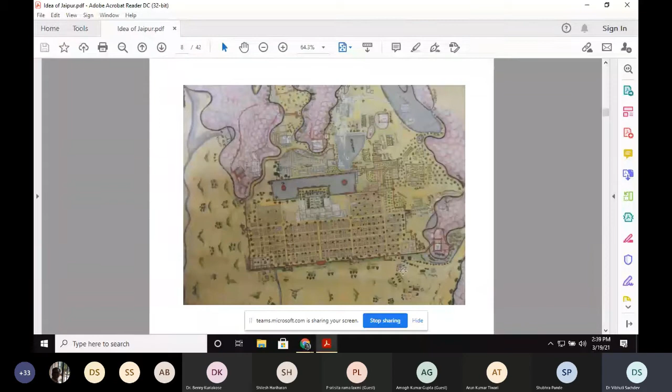You can see these drawings have a lot of information, like miniature paintings have. In miniature paintings also, you must notice, to a modern mind, that is a wrong perspective. But the thing is that it uses a sort of multi-perspective to show as much information as possible, so that at once you can see what is outside, what is inside the room, what is behind the house in one drawing. That was kind of communication, and layering of information was of course the key agenda.

And this is a later drawing of Jaipur, and you can see the mohallas and the chaupars and the principal streets.

So my process was to reconstruct from the theory that I had studied for over 3 years as a PhD, but before that I had relearned Sanskrit and engaged with the texts, to kind of reconstruct the process of design from theory to what Jaipur is.

So I looked at the mandala, of course, and there were lots of guidelines, that a city with seven—a pura is one that has 7 gates, one that has principal streets that are perpendicular to each other, a central open space. And this is the sort of concept that was beginning to emerge from various readings of Vastu Shastra texts.

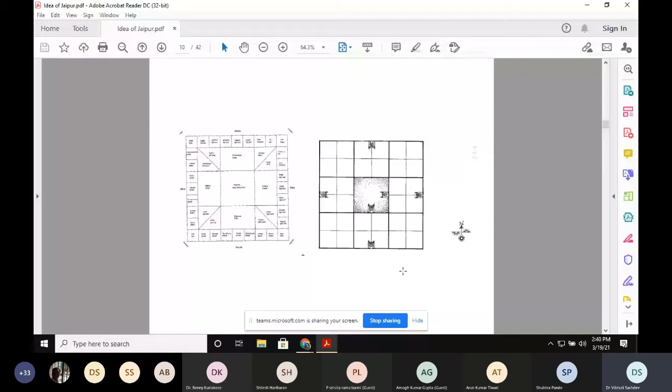Now, this principal road that leads to Agra and Ajmer is the Mughal Highway. This is where most of the revenue is collected. This is the road that the Mughals used to go to their pilgrim sites, two very important Mughal sites of Agra and Ajmer. And then you have a road that goes to Delhi, which is this one, another very important road which cut across the site.

So, in a sense, you've got these hills. You've got Nahargarh on the top left, and in the southeast, you've got a hill with a Surya temple in the middle. This is the Surya Mandir. And then you've got this lake.

So, basically, the 2 principal axes of the site are already present. One is that one cannot cross the Mughal Highway, because the land did not belong to him.

The land ended with this highway, and the other important use was the road that went through the site. So obviously, when you have a site, and Jai Singh had decided this to be a commercial city, a commercially lucrative city, what you decide is that when there is a road with already existing traffic and footfall, you route it through your site.

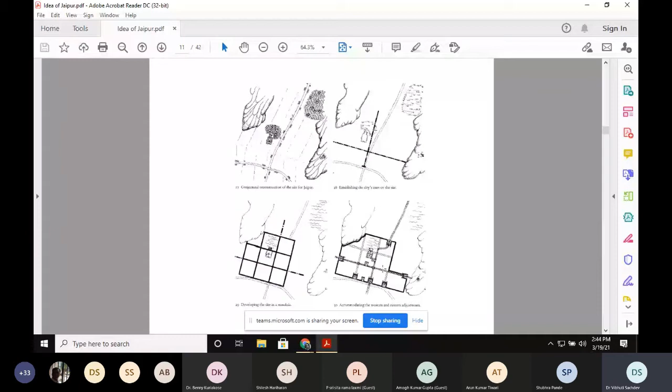You can see in the bottom right diagram the central Govind Dev temple, and in the central square is also the palace, the king's palace. You've got the road that cuts across, going north to Delhi, which is the Jauhari Bazaar, and then you've got the chaupars, and you see the form emerging of the entire city. And this is Jauhari Bazaar.

The material Jai Singh uses very cleverly - because this was designed and built in 4 years flat, a rapid city, designed quickly, helped by Vidyadhar Bhattacharya, who was a diwan, a planner - was designed using the color palette of the authority.

Bear in mind, the Mughals were the great builders. Akbar was a great builder who built Fatehpur Sikri, and then Shah Jahan after him built a lot in marble. Akbar used red sandstone. What Jai Singh very cleverly does is project the idea of red sandstone, but it is not red sandstone - it is rubble masonry, lime plaster, and geru. Geru is brick powder, terracotta. Terracotta means cooked earth - terra is earth, cotta is cooked.

This is what he uses for all the buildings that face the streets, so all the public spaces are in this color. You get this impression of red sandstone, but it's not red sandstone. It continues to fool us, and tells us that it might be pink, which is another story of how it got pink from geru.

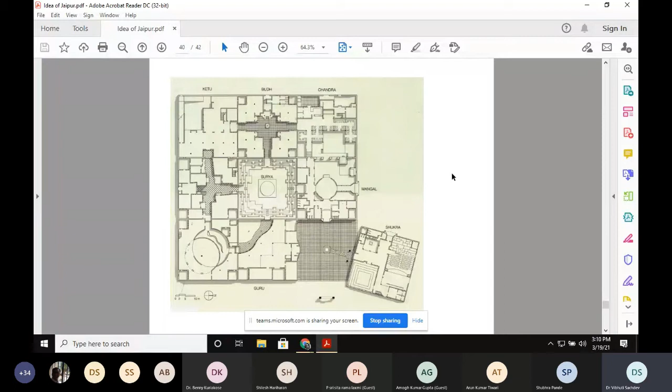So this is that, and then of course you have Correa's building, Jawahar Kala Kendra, which, apart from what I showed you of how the square moves to plug the gap between the hills, Correa uses that here as a conceptual tool, a conceptual motif, to give a reference to Jaipur when he moves the ninth square of the mandala out. Among the nine planets he's used, there are also references to Alvar Aalto, who was a great inspiration for him. And you can see the central courtyard, which has a reference to Modhera in its seating.

And this is my last slide, coming to the 1990s or late 80s. Thank you.

Thank you, ma'am. Thank you so much. I can just remember one quote that talking to or having a conversation with a wise person is worth reading 1,000 books. And definitely you have taken us through immense knowledge about one of the famous Indian urban fabrics. You truly have elucidated the history, culture, forms, material, spirituality, vastu, and whatnot. Thank you, ma'am, we are really enlightened with your presence today.

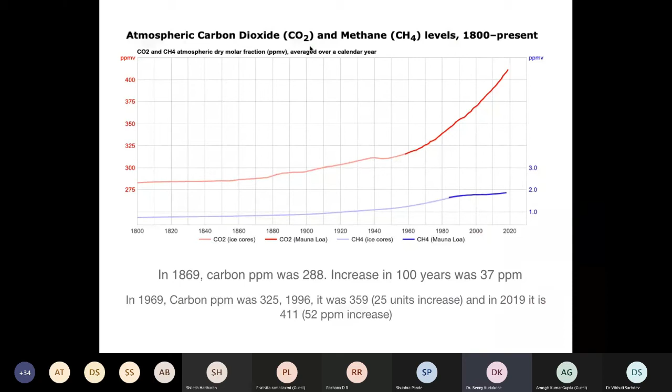But by 1996, it was 359. What happened in 100 years before now happened in just 27 years. And in 2019, after only 23 more years, there was a 52 parts per million increase. So what happened between 1869 and 1969 was 37 parts per million, but between 1996, after the Kyoto Protocol was signed, and 2019, there was 52 parts per million increase. So things are not happening in spite of all these agreements and protocols.

You have to understand that for the first 12 million years, the carbon dioxide ppm never crossed 280 ppm. So these figures matter quite a bit as far as things are concerned.

One of the other statistics is that 90% of urban dwellers have been breathing unsafe air, resulting in 4.2 million deaths. Perhaps more people will die in the world because they breathe unsafe air than from corona as a whole. I don't think the corona death figure will be less than 4.2 million. So we worry about corona, but we don't worry about unsafe or polluted air in our cities.

Some of the Indian cities are highly polluted. So we don't realize the importance of these things.

Now, how is it related to architecture? This is an old statistic, but still, 25% of the timber, virgin timber, is used in building construction, which is in turn responsible for global warming.

40% of the raw stone, gravel, and sand is used worldwide each year. Buildings consume 16% of the water, 40% of the energy used annually, and close to 70% of the sulfur dioxide produced by fuel combustion is produced through the creation of electricity used to power houses and offices.

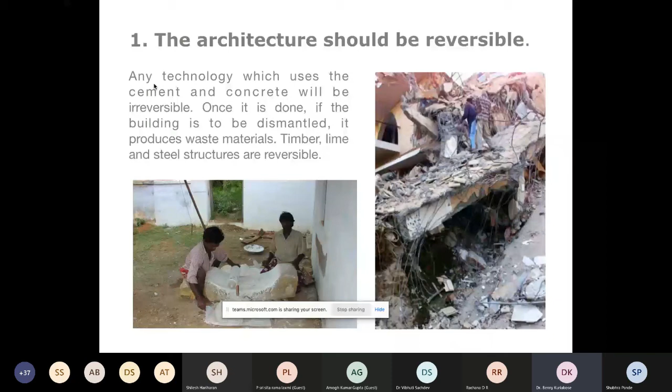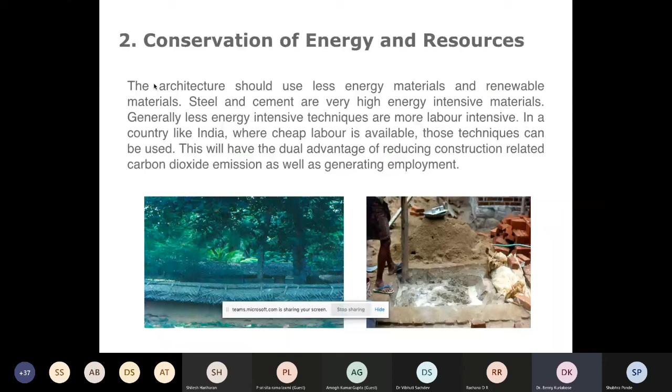Conservation of energy and resources is very important. Aluminium uses an extensive, great amount of embodied energy. Cement has a great amount of embodied energy, and steel also has a great amount of embodied energy, but compared with aluminium, steel will have much less. So we have to look at conservation of energy and conservation of resources. Many of the traditional methods and techniques consume less energy, and that is what is happening.

When I say conservation of energy and materials, we find even in our construction there are a lot of things which could have been avoided. Avoid waste in building construction. No-waste houses, not low-cost houses, is what we require. Of course, low-cost houses are required, but I will say no-waste houses are more important. If something is not necessary, then don't do it. I find a lot of buildings where you build a wall and clad it with glass at a very expensive cost, letting in all the heat, and then you run an air conditioner, calling it energy efficient, or a green rated or platinum rated building.

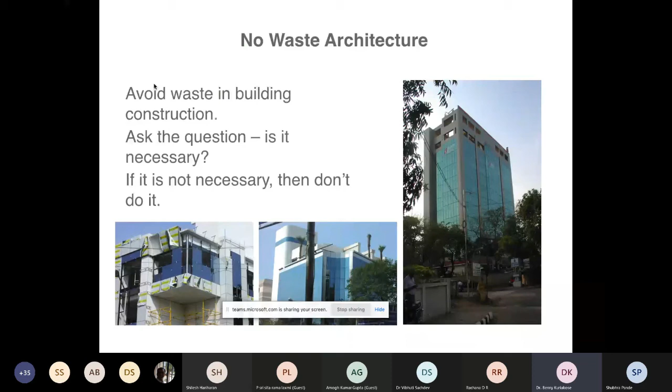I think we have to look at architecture in a different way, the way we try to do buildings. The conservation of buildings is very important. There are a lot of old buildings.

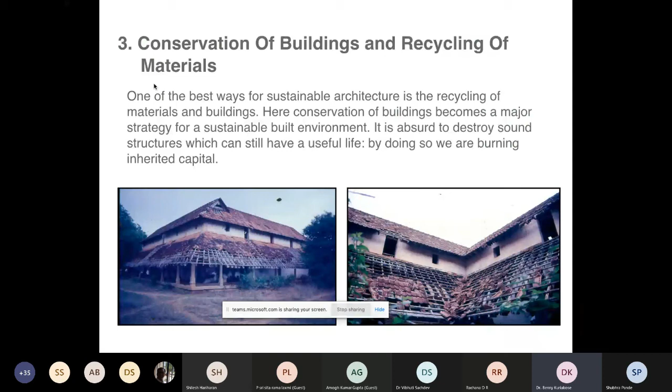It never figures in our strategy to fight against global warming and conservation. I'll come to this argument later. Not only should materials be reused.

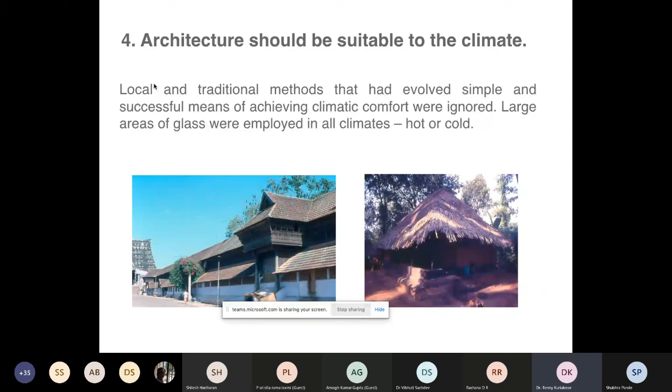Architecture should be suitable to the climate. When you expose a multi-storied building morning till evening without any sunshade or overhang, you are increasing the running cost of the building.

Architecture should be suitable to the cultural and social aspects of the people. This is very important. You can't ignore this, especially when you build in rural areas, where you have to cater to their social and cultural requirements. Conservation of crafts and technology is also very important.

There are so many technologies which are used traditionally, which are very low energy intensity kinds of things. These are the five principles. I'll give you some case studies before I wind up the session.

Environmental responsibility is very important. Social responsibility is important. So all these are pillars of sustainable development. We want a world where we can live comfortably. We want a viable thing. We want an equitable thing.

So all these things are very much required, and we have to link the design that we do with sustainability. When we try to look at sustainability, I'm not going into the details, but I will say that what is sustainable in Kerala will not be sustainable in Assam or Rajasthan. Sustainability depends on the context and the location.

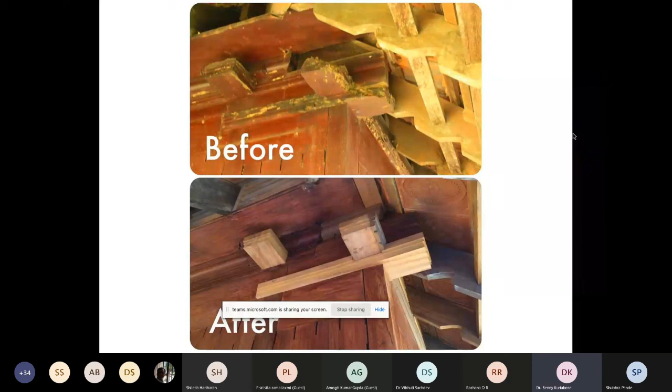We take 50% of our practice as recycling of buildings. Here too, the damage is there, but we replace the minimum. Don't try to replace everything, and when you repair or conserve an old building, don't try to make it look new, which is very important. Many buildings, when conserved and repaired, end up looking new, which should not be the objective. So we do the minimum repairs and try to work with the craftsmen and train them on these things.

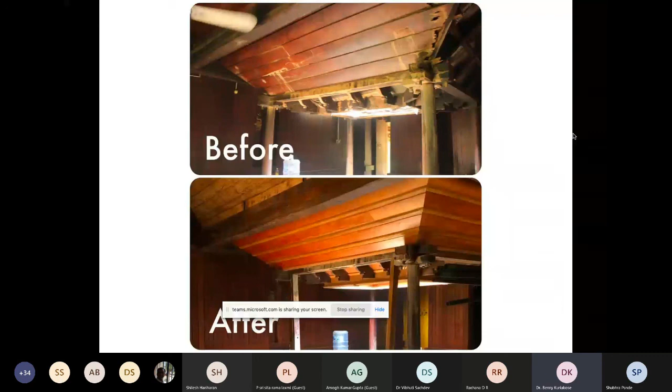This is an old house which has been converted into a boutique hotel. We have added toilets, and this is a new addition which has been built. Conservation is very positive — you can add new buildings to existing old buildings. This is the courtyard of that traditional house, and this is another courtyard which is coming.

Now, why is conservation very important? Conservation of buildings, as I said earlier, is recycling the whole building. Compared with looking at the labor in the city, new construction involves less labor and more materials, whereas conservation involves more labor and less materials.

So what we want to do in conservation is conserve resources, practice sustainable architecture, and use the minimum amount of material and resources. So when you do conservation of buildings, you are saving these things.

When you reuse an existing building instead of demolishing it and replacing it, it's a good way of conserving energy and making less impact on the environment. That is why, as a practice, we use it in more than 50% of our projects.

There are a lot of studies done on the sustainable aspects of conservation. One is that 2 to 3% of housing stock is recycled every year, and there will be perpetual employment in the building trade.

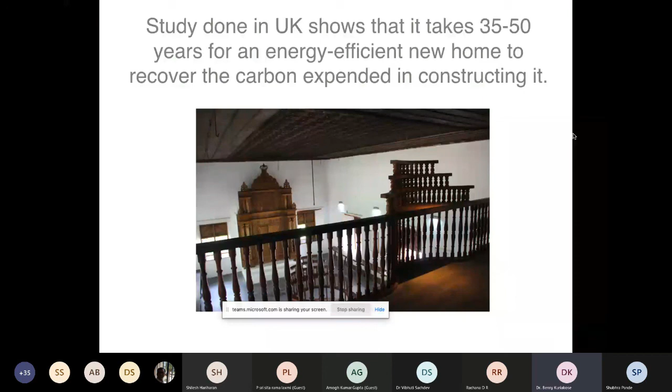What they are trying to say is that the traditional buildings were more energy efficient compared with many of the new buildings.

What we have to see is heritage as an economic asset, which should be capitalized as part of a development plan. Heritage is not a liability, and a historic building is not a liability — it is an asset, a resource.

And if we try to see it as a resource and an asset, then we will be able to make less impact on the environment.

Even if you use the most green technology, it still makes an impact on the environment. The greenest building is one which already exists, because it made its impact on the environment 25, 50, or 75 years ago.

If there is not enough light in an old building, add more windows. If the flooring is too rough or something, just try to make minimum changes. If there are no toilets in an old building, add toilets.

We have come to a stage where we can do anything in an old building. There are cases you see in videos on WhatsApp where buildings are moved from one place to another.